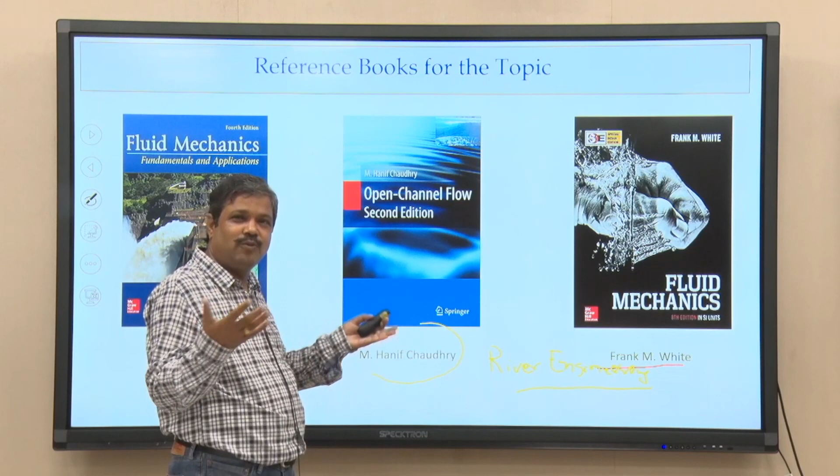But as I said, we are not introducing a new concept - whatever concepts we have learned, how to use the control volume concept, mass conservation equations, and momentum conservation equations, we apply for open channel flow. If I talk about open channel flow, I think almost all of you are familiar with it.

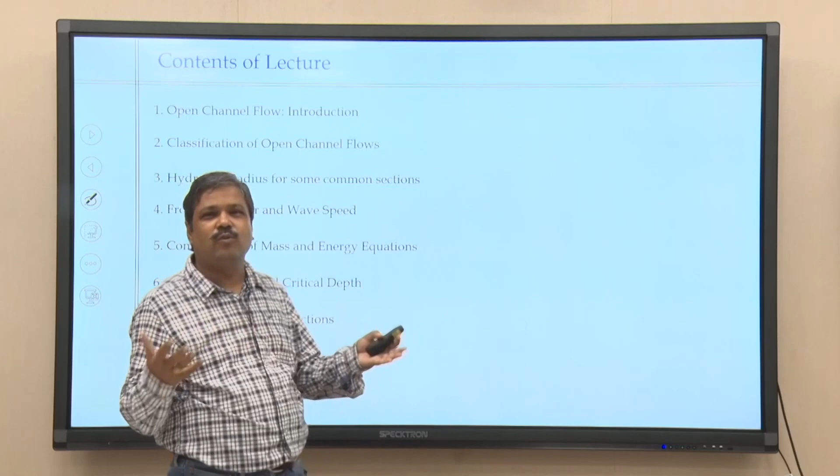If you look at most rivers, they have curved natures - we call these meandering rivers. But why? We don't know, we don't look at that much detail. But in open channel flow, we can address that - like when you have a river.

Natural flow systems - let us take examples like river flow. As you know, a river does not flow in a straight path, so it has meanders, curves. That is what river flow is.

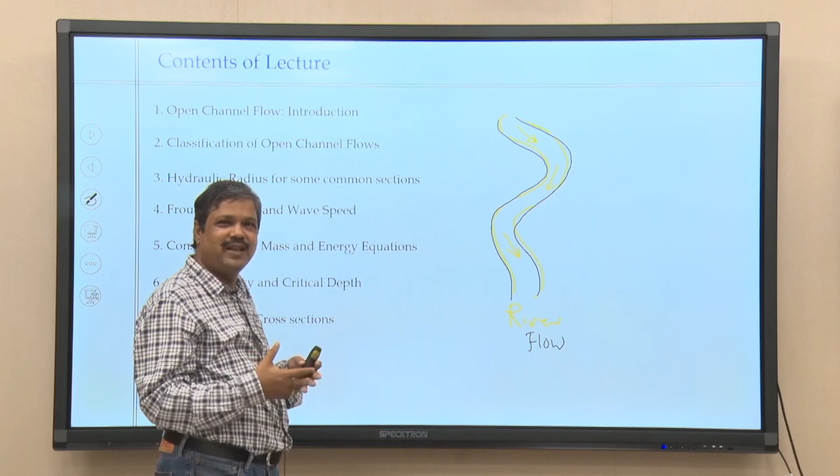Similarly, you can see these natural flow systems which are very complex. Today's world we have Google Earth geovisualizers, where you can see the complex river patterns. Anyway, we are not discussing that, or we try to make canal systems.

So you know, we construct canals or we construct drains, the stormwater drainage systems, which will have more or less a series of junctions, a series of outlets. So if you look at that, the flow can come this side, can go this side, like this.

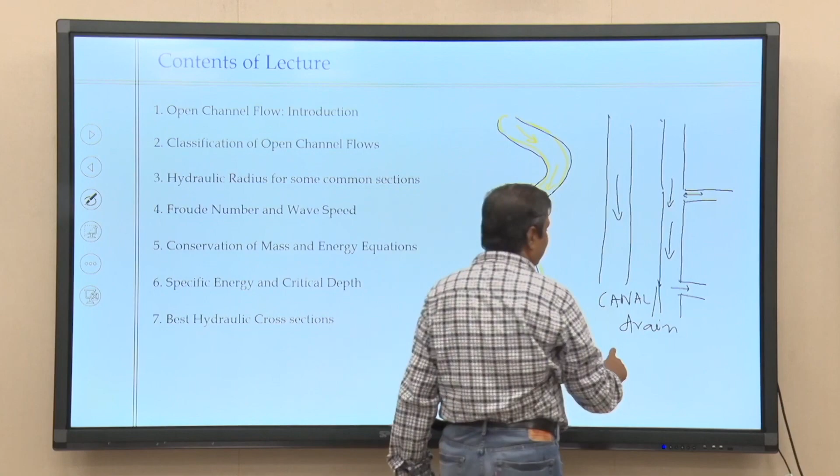So there are man-made systems like canals, drainage systems, stormwater drainage systems, and navigational channels - civilizations built the best navigation channels. So if you look at all of these, these are all open channel flow.

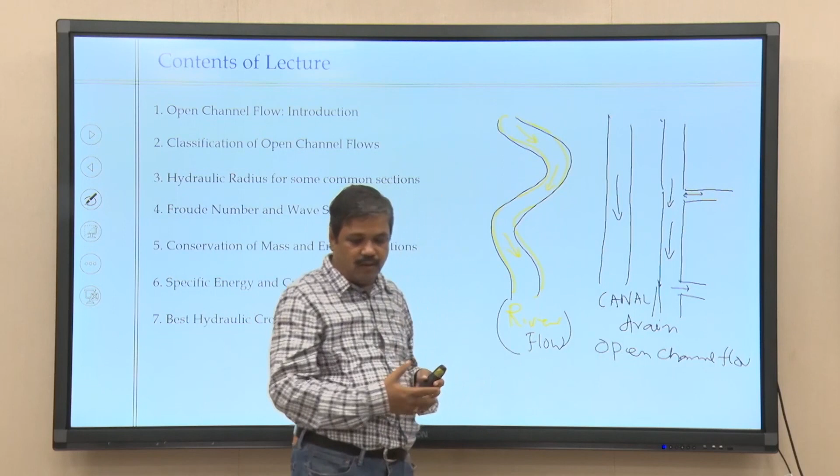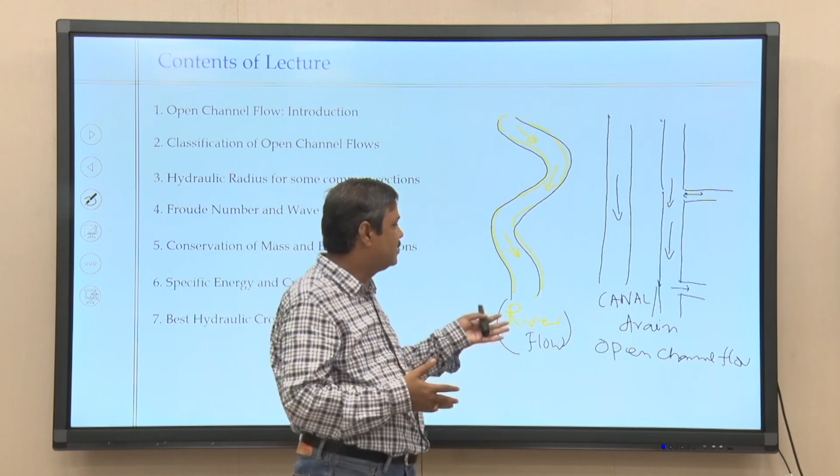On one side we have natural systems, and on the other side we have man-made systems for drainage networks, canal networks, and navigational canal networks. So there are a lot of systems we build to transport water or any liquid, any solid waste, through drainage systems or canal networks.

Which is having a free surface - basically we are talking about when we have a free surface. That means, if I take a cross section of a river, or a cross section of man-made channels, at say section 2 and section 1 - if I take the cross section at section 1, as expected, being a natural system, it could have a free surface here, for section 1.

Okay, so this is the bed, these are the cross sections, this is the top width, this is what the perimeters, as you know it. So this is the flow channel we have for natural systems, where the geometry may be complex. But when you come to canals, if you look at most canals nearby, either it is a trapezoidal or a rectangular shape. It will have the flow depth, it will have the perimeters, and it will have the top width.

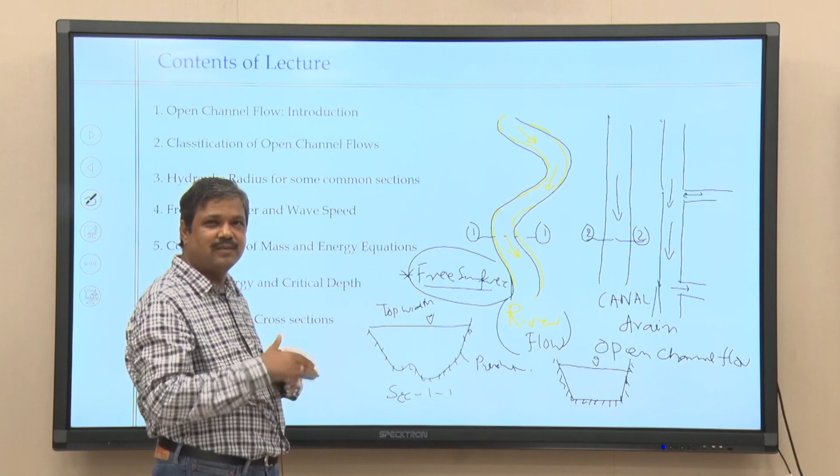Mostly what we are getting, both things have a common feature: the free surface. At that location the pressure is atmospheric, because it is a free surface. So at these locations pressure is equal to pressure atmosphere.

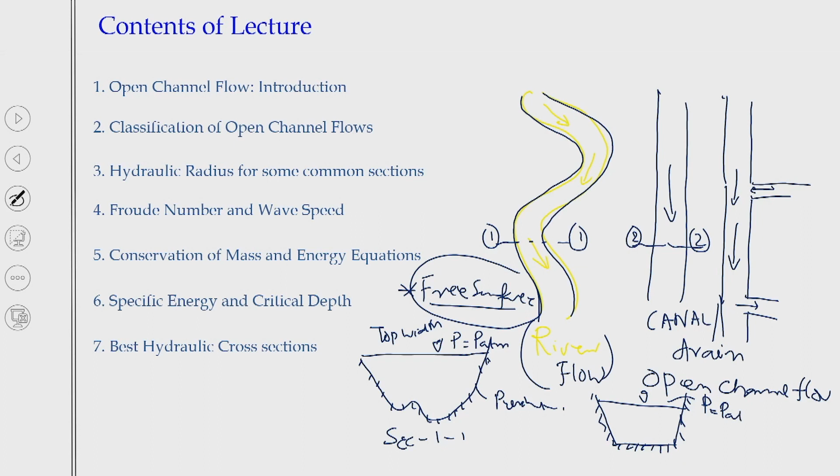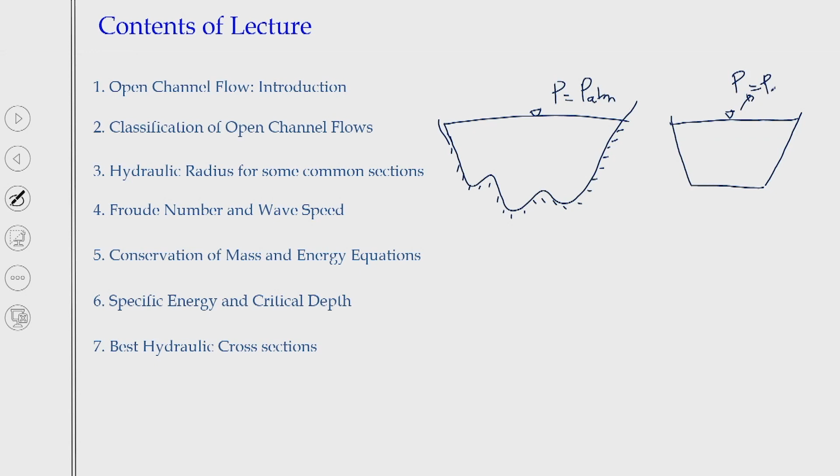Let me resketch the concept: if I have a natural river and I have the free surface, I can put it like this. This is the perimeter of the channel, this is the free surface where pressure is equal to P atmosphere. And here I have a man-made canal, maybe carrying storm water or sewage, whatever it be, but it has a free surface.

Same way, if I have a pipe that is not fully filled, so it is half filled, if that is the condition, the pressure at these locations also comes to atmospheric. This is what we can understand very easily: when you have a free surface or open channel flow, the pressure at the top where the water depth starts, designated by these symbols, is at atmospheric pressure.

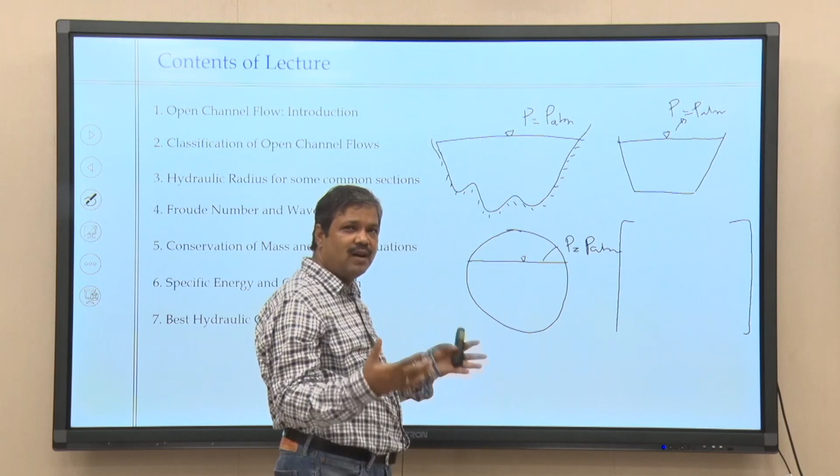So if that is the condition, we have only two force components with us now, because there is no pressure force, since pressure is at atmospheric levels. So we have two forces: one is gravity force, second is friction force. That is two. There is no surface pressure force component.

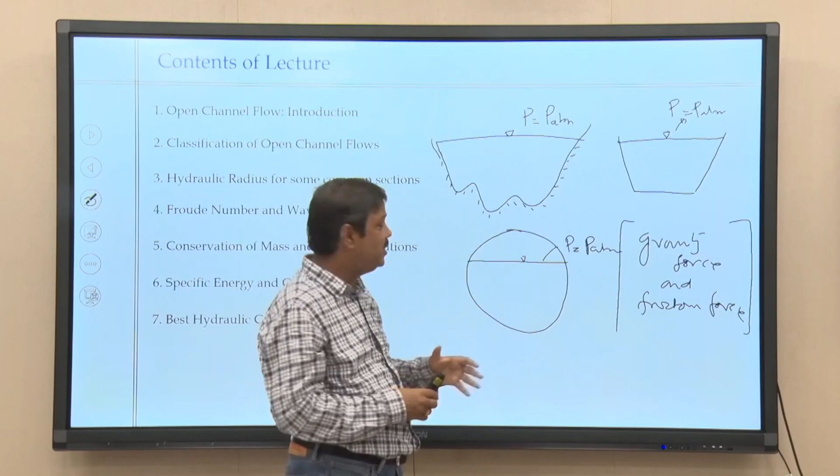We will discuss this more because there is a process. That is the difference between pipe flow and open channel flow. In pipe flow, we have pressure flow energy, but when we talk about open channel flow, we have only two forces: one is gravity force, another is friction force.

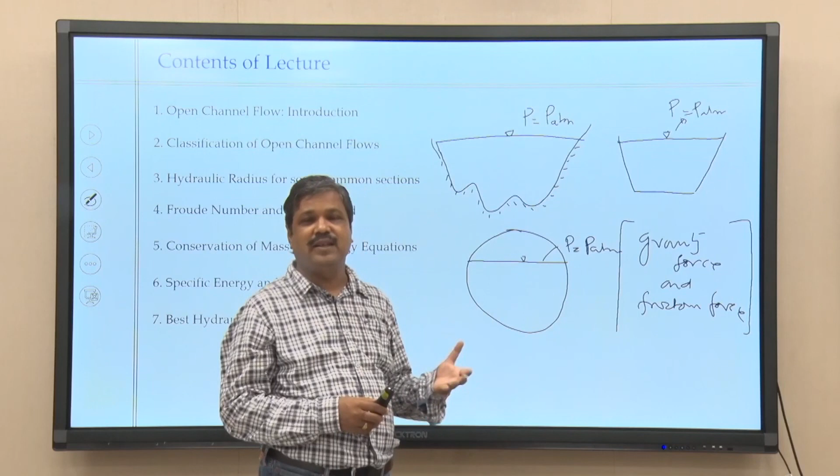Where does the friction come from? The friction comes from the bed or the perimeters. That means whatever type of perimeter I have, whatever type of roughness it has, similar to what we discussed for pipe flow roughness, the same concept applies here. Because of the presence of roughness in the perimeters of the channel, it gives a resistance force, a frictional resistance force.

The frictional force is given by that. So depending on the type of boundary and material roughness present, that is what will give you the frictional force, and you know what the gravity force component will be for any flow control volume. We can find out the gravity force, and we know the frictional force, because the friction force comes from the perimeters, and at these atmospheric levels there is no...

There will be drag forces, but that drag force is much negligible. Air drag force will be much negligible compared to the liquid we are considering, so that means we nullify that. Not only that, as you know, we have no-slip boundary conditions.

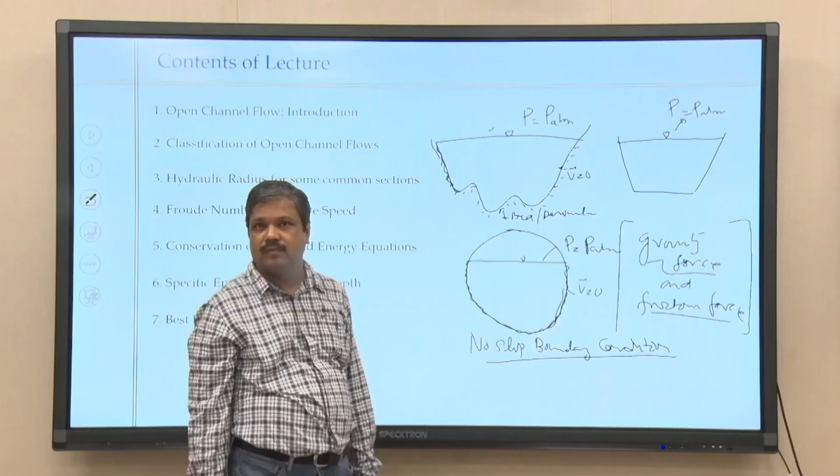Okay. That is what we discussed in the very first class, no slip boundary conditions. The no slip boundary condition imposes that the velocity near to this boundary will be 0. So, because of the no slip boundary condition, the boundary is fixed at the location, so the velocity becomes 0.

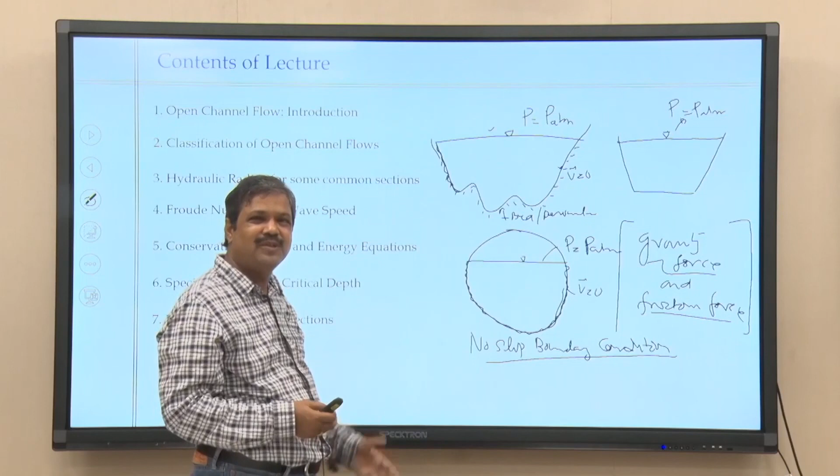So, you can now conceptually see that we are coming to a very simplified problem. We have solved many difficult problems in earlier classes, like the integral approach and the differential approach, but open channel flow is a very simplified case, because there is no pressure force component, the pressure is equal to atmospheric, and when we impose the no slip boundary condition, the velocity near to the boundary will be 0.

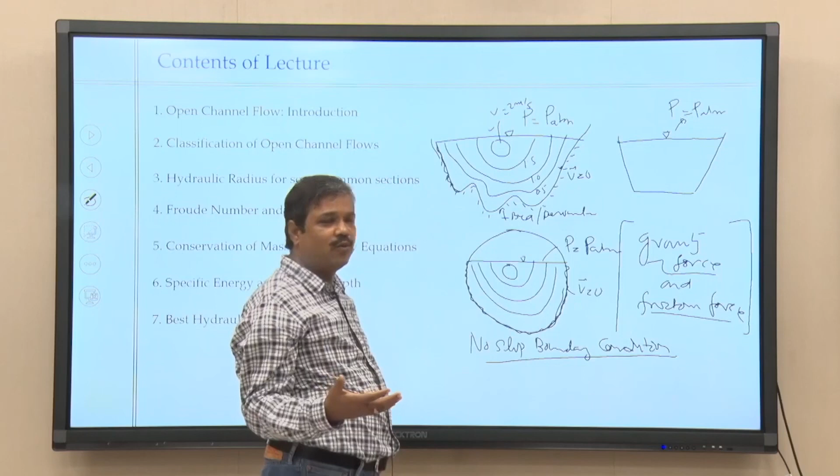So, since it is 0, I can draw the velocity distributions, the isovelocity contours. Maybe this velocity is equal to 2 meter per second, next maybe 1.5, 1, 0.5 meter per second. These are the contours of equal velocity, because near to the boundary velocity is 0. So, you can have a velocity distribution like this for this case also.

That is why I always encourage you to just draw the shape and try to understand how the velocity distributions are happening. So, if you understand that concept, you understand many of the things.

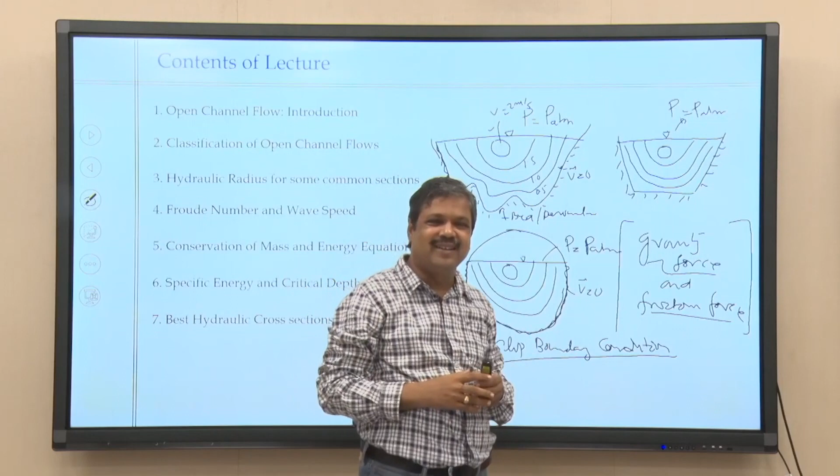Now, at the introduction level, we will also talk about the classifications of open channel flow, hydraulic radius for some common sections, and the wave speed and Froude numbers, which we have already discussed in dimensional analysis. Then maybe the next class will talk about other components like specific energy, the critical depth and all. But today's class will be confined up to the wave speed. More details I will discuss on that.

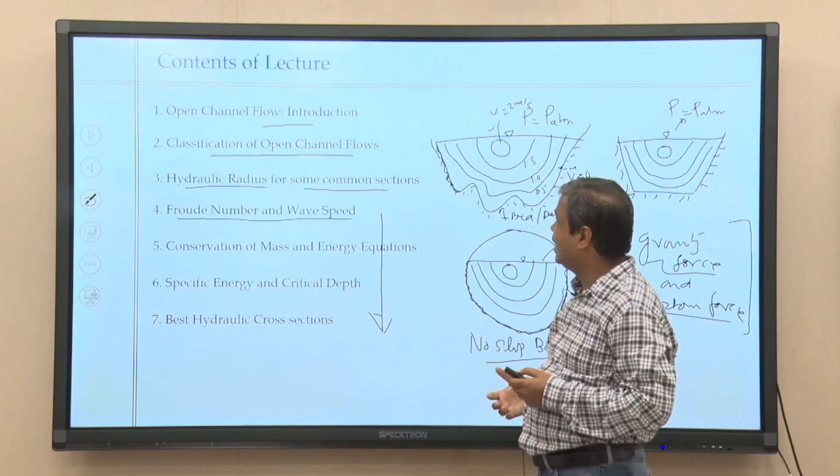Now, as I already said, basically we have the free surface boundary conditions. Once you have the free surface boundary conditions, remember basic pipe flow. When you are solving a pipe flow, I am drawing the same thing here. If you remember, we used to draw the hydraulic gradient line and energy gradient line for a pipe flow.

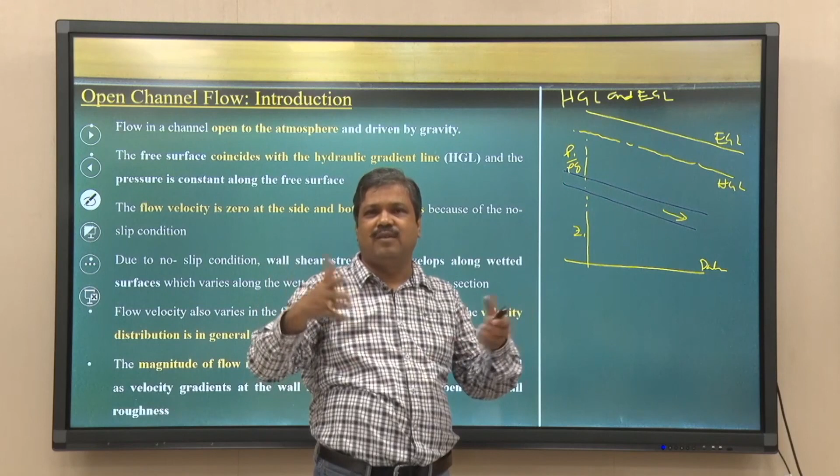If Z1 is from a particular datum, that is the datum head, then you have a pressure head, P1 by rho g, then you start the hydraulic gradient, and just on top of that you start the energy gradient line. That is what we did for the pipe flow, and that is the way we reflect how the energy losses are happening, or how the energy gradient lines are at each point of a pipe network, with a very simple representation through the energy gradient line and hydraulic gradient line.

But now I am coming to open channel flow; this is the pipe flow. So, this is my free surface in a channel flow. This is a channel flow having a slope, let it be theta. So, if I consider a datum, my free surface will be the hydraulic gradient line. Above that, I will have the energy gradient line.

Let y be the flow depth, and z is the distance from the datum. And this is V square by 2g, and you can have the kinetic energy correction factor. So, the technical difference between the pipe flow and this is that the pressure flow energy is not there when you talk about open channel flow.

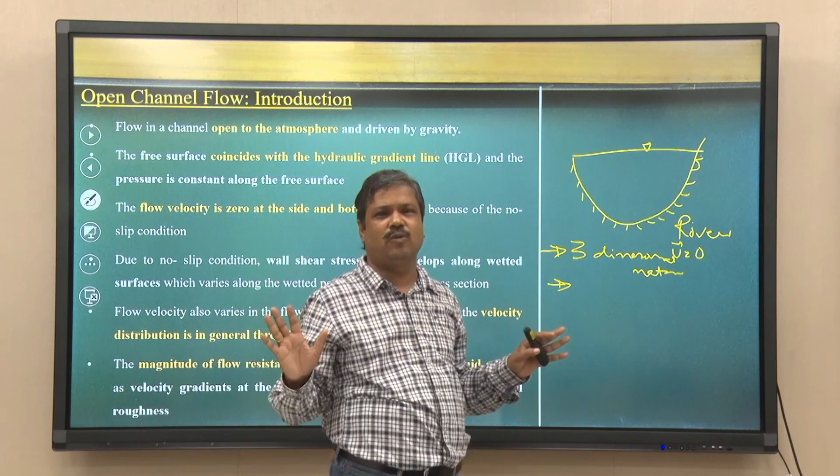Except very few cases, for example, for open channel flow when you have very thin sheet flow, maybe during the rainfall, beyond that most of the flow is turbulent flow. And we will discuss the flow characteristics in terms of subcritical, critical and

supercritical. This is just analogous to the subsonic, supersonic and sonic conditions you discussed in compressible flow. So, the same way, for incompressible flow in open channels where the gravity force dominates, we classify the flow into 3 categories: subcritical, critical and supercritical.

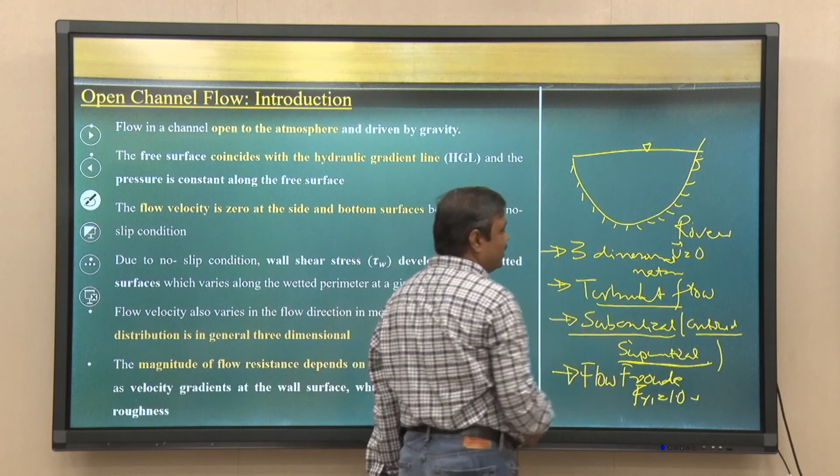As we discussed at the very beginning of dimensional analysis, we use the flow Froude number for these classifications: if the Froude number is equal to 1 it is critical, if it is greater than 1 it is supercritical, less than 1 it is subcritical. So basically we can have different classifications of the flow. We will discuss in more detail why we need subcritical and supercritical flow conditions.

What we are discussing is that we get the frictional forces, the shear stress acting over the surface, that is the wall shear stress developed along the wetted surface, which varies along the wetted perimeter at a given cross section. That variability is there, as you can understand from the shear stress distribution.

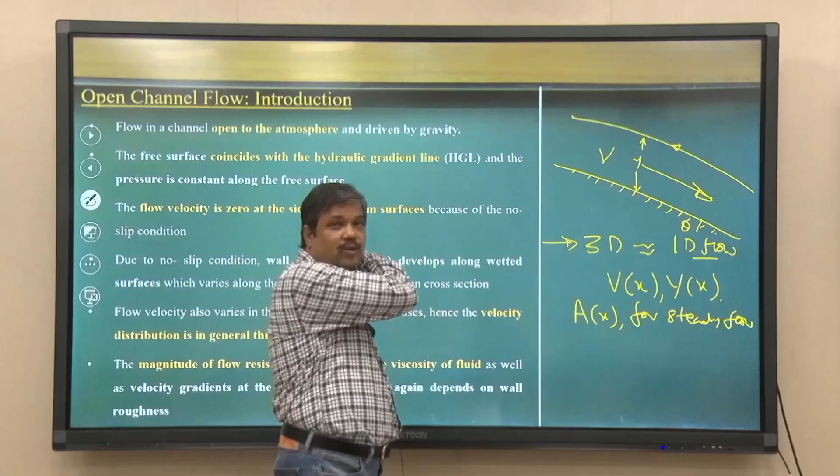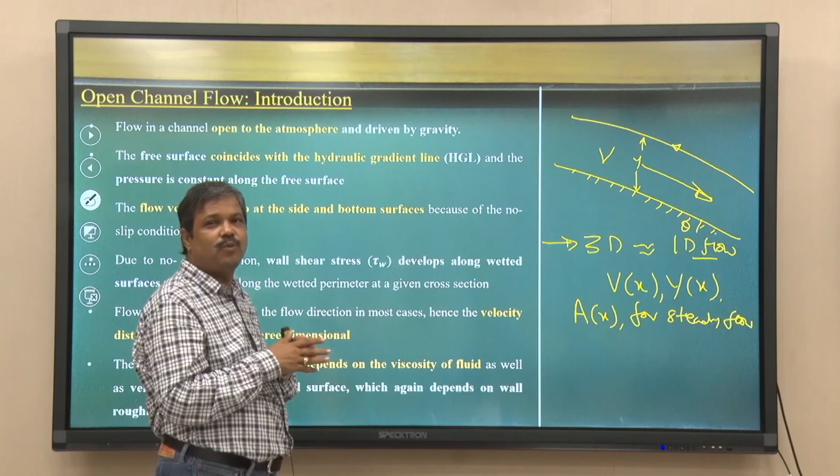If I have the velocity V, then I can say that V varies along the x direction, and if y is the flow depth, y also varies with x, and the area of flow also varies with x, for steady flow. For a steady flow, if I do not consider other dimensions, the average velocity of the flow in the x direction is going to change, the area of the flow is going to change, and the depth of the flow is going to change, which is of more interest for us.

But if there is an unsteady flow, and most of the time we also encounter unsteady flow with one dimensional approximations, we have V(x, t), y(x, t), and area A(x, t). That is what we discussed a lot. So, it will be a function of space and time. So basically the flow varies along the direction in most cases.

So, the velocity distribution, generally in three dimensions, is what I discussed. The magnitude of the flow resistance depends upon the viscosity of the fluid, as well as on the wall roughness, what type of roughness factors are there.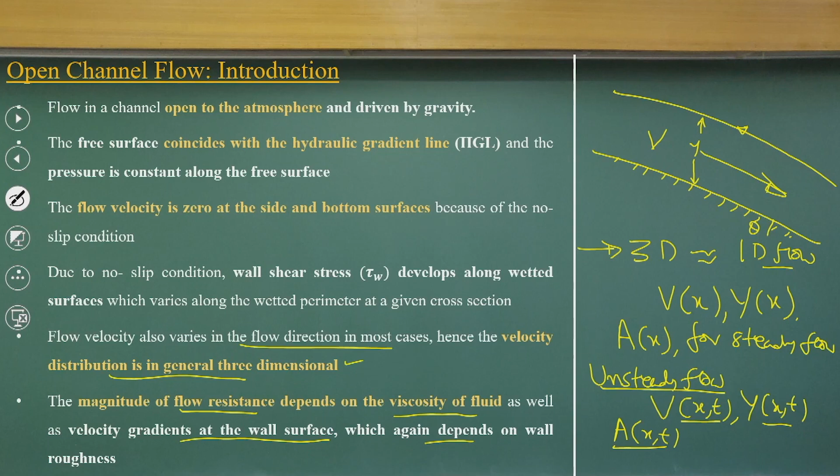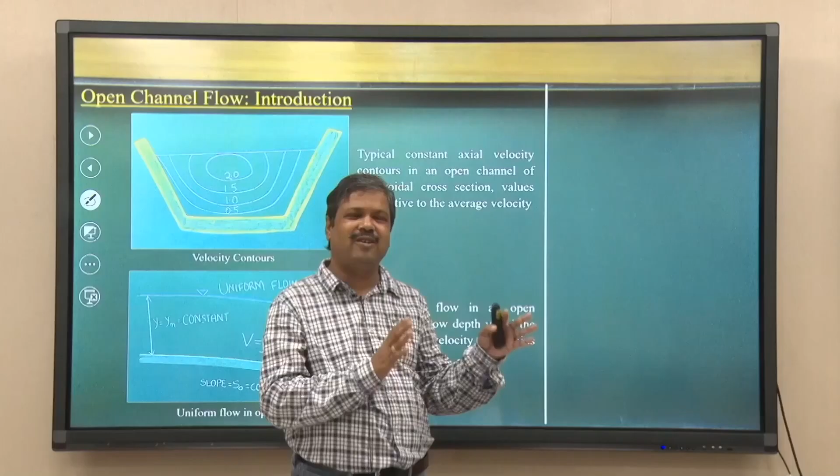So, the basic idea comes from this open channel flow. As I said at the very beginning, this is a very introductory level, in a very simplified way, that I am going to deliver these lectures. But if you are interested in an advanced level, courses are there in open channel flow, and courses are there on river engineering.

So, now let me come back to what I sketched at the very beginning. When you conduct a lab scale experiment, any flume type of experiment, which we have shown in dimensional analysis and similitude, continuing the same, we can measure the velocity distributions in an open channel. You can have instruments to measure the velocity.

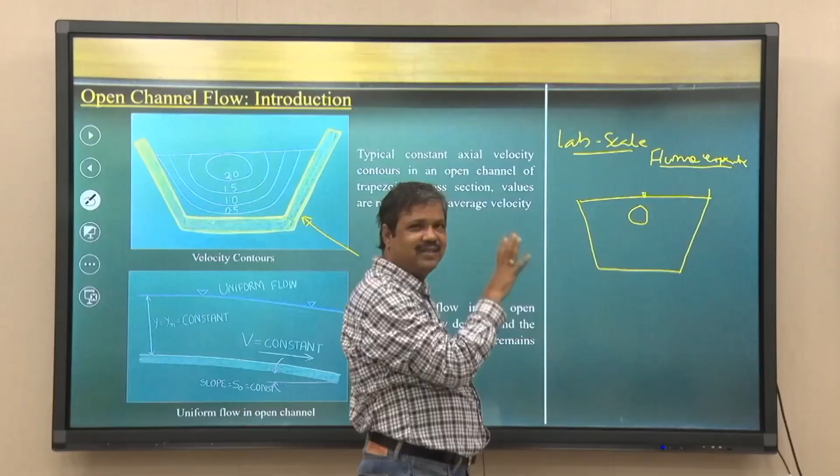As you measure the velocities in any trapezoidal channel, as expected, the maximum velocity will not be at the top. This is lab scale experimental data, that is what I emphasize. This is experimentally verified; this is how the distribution happens. So, you will get the velocity distributions like this.

Again I am repeating, this may be 2 meters per second, this is 1.5, this is 1, this is 0.5, and along the boundary the velocity is equal to 0. But we observed from experiment that if y is the depth, then the maximum velocity occurs about 0.2 times y, or 20% of the flow depth from the top surface. That is the experimental finding about this velocity distribution.

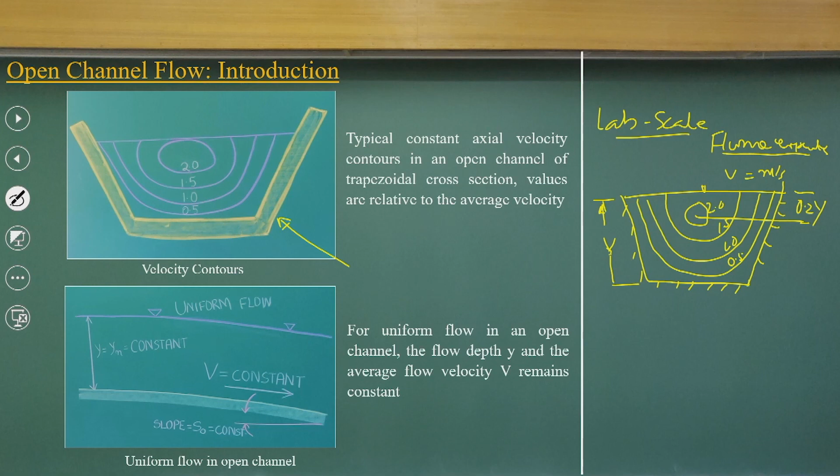That means we can easily get the velocity distributions from the experimental data set. This is not difficult. And since it is a turbulent flow, its velocity distribution will be a logarithmic velocity distribution, as we discussed in the boundary layer concept. So, velocity distributions will also follow the logarithmic velocity distribution.

But we are not worried more about the velocity distributions in these classes. We are more towards understanding the general nature of the flow. If I know these velocity distributions from the experimental data, mostly what we are looking at is how much energy loss is happening. That is our worry. We are not bothering about the velocity distributions, because anyway it is an open channel flow.

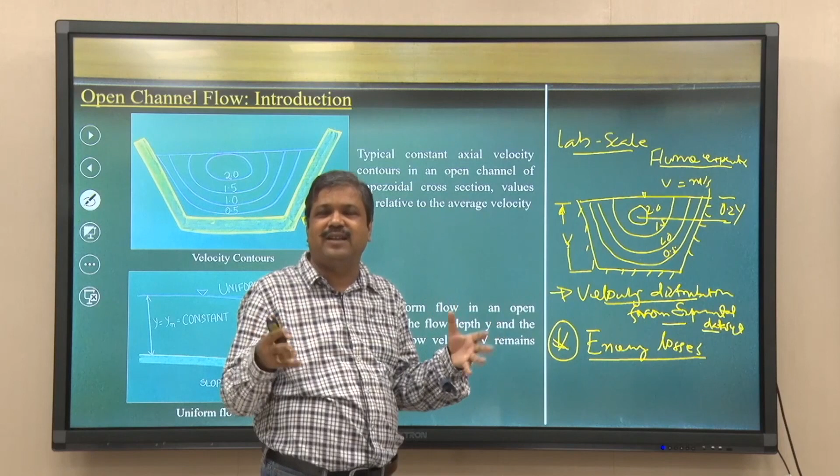For undergraduate levels, here we are talking in more detail about how much energy loss happens, as we estimated for the pipe flow. We estimated it using the Moody chart, and with a lot of examples we demonstrated how to estimate the energy losses. Same way, if you have a network of open channel flow, we have to understand how much energy loss is happening for different conditions.

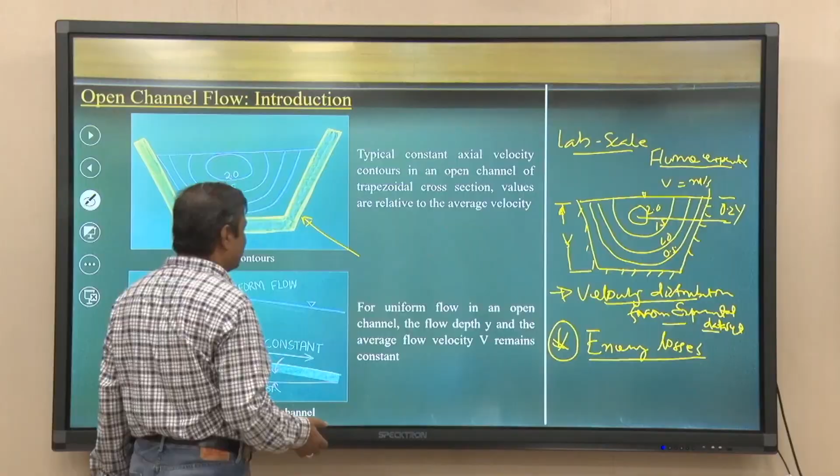So, there are the classifications. One is uniform flow, as we discussed in flow classifications; I am not going into detail. Now, as I discussed, we talk about natural channels, artificial channels and open channels. The name open means one of the sides is open, so it is not having a cover at the top.

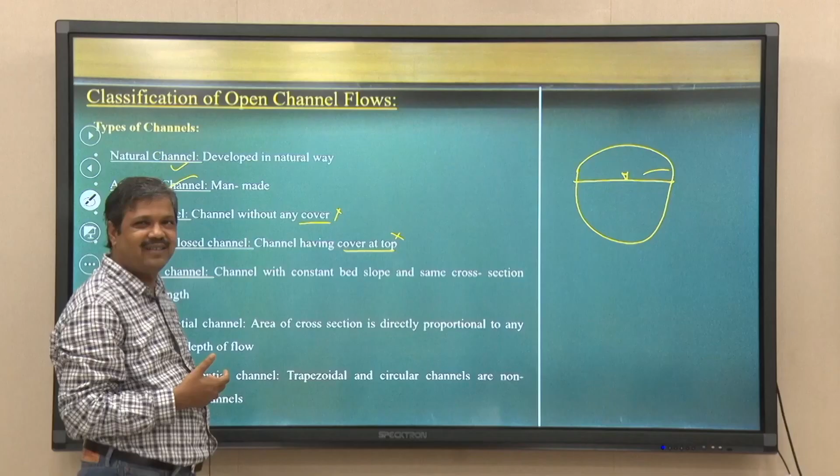I think this definition, without any cover, is not that correct. I will tell you that wherever you have a free surface, even in a pipe flow, that condition is open channel flow; it is not related to covers. Anyway, that may be a simple way of explaining, without going through pressure being equal to atmospheric and the pressure energy not being significant in this case. The cover does not matter.

We go for very simple cases like prismatic channels. Many times when you have man-made cross sections, we try to make the same cross section along the channel, with a constant bed slope.

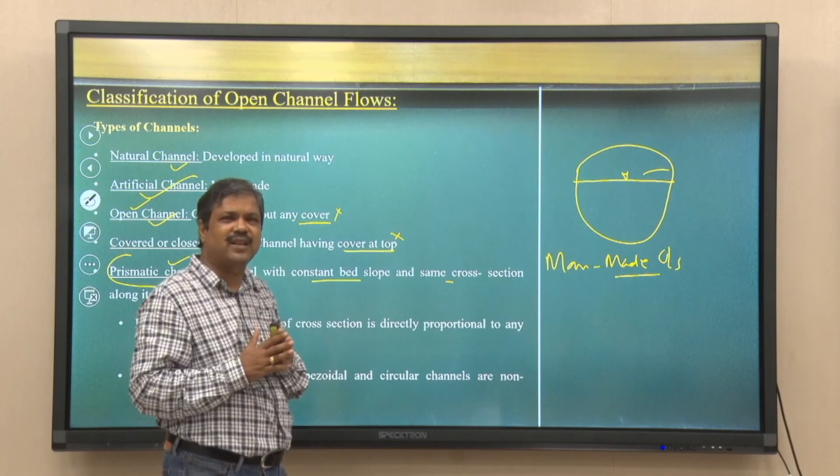That is what you do when you are laying out canals. Mostly you try to make the cross sections the same, as well as the bed slope more or less constant. So, that is what prismatic channels are. Then, when the cross section is directly proportional to any power of the depth of flow, this is an exponential channel, and trapezoidal channels are non-exponential channels. Those are basic definitions.

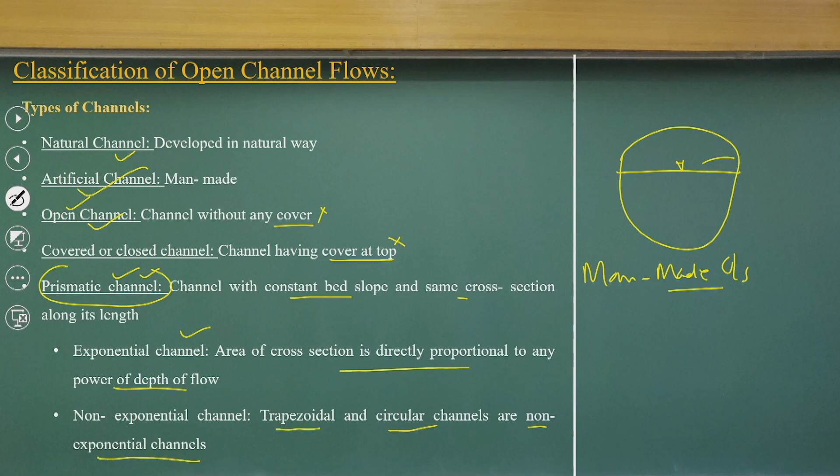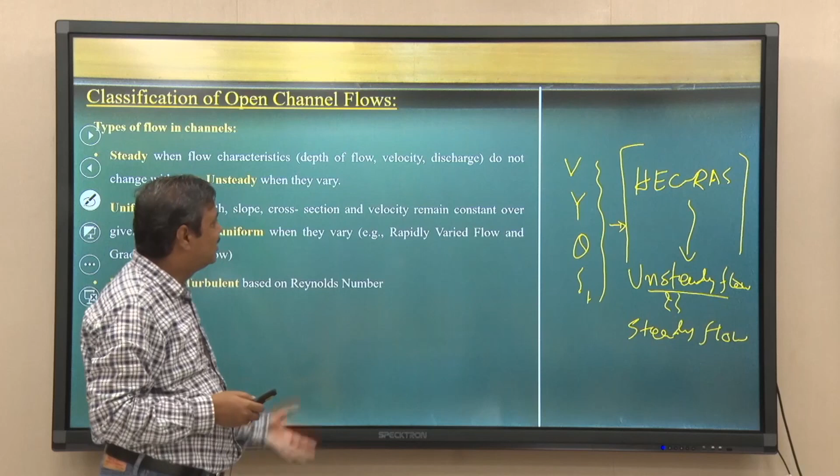So, steady flow is a very simple approximation we make for open channel flow, but in real life conditions, even for canal flow or river flow, mostly they are unsteady flow. Mostly they are unsteady flow, but we approximate them as steady flow. But nowadays for river models we have HEC-RAS, so we can use detailed unsteady flow analysis, that is possible, but anyway this is undergraduate level.

Then another simplification is uniform flow. Uniform flow is where the depth, slope, cross section, and velocity all remain constant. So, all are constant: depth, slope, cross section, velocity. How does it happen? It happens when the sum of the forces acting on the system is 0.

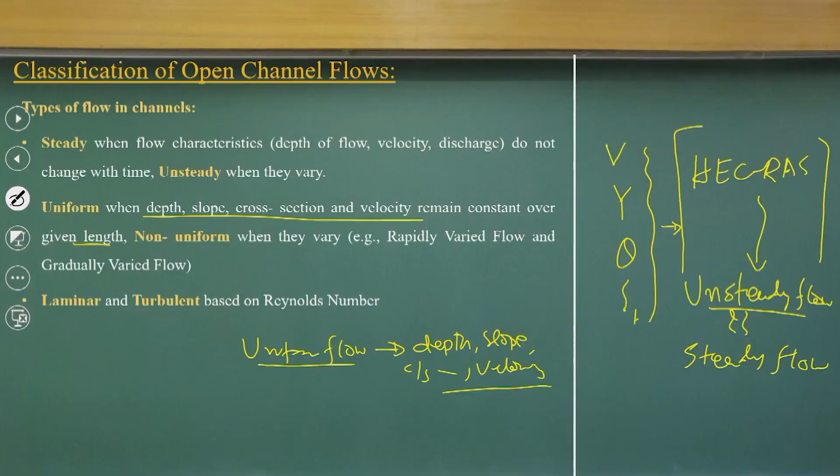It is like the terminal velocity of a free-falling object, which attains a terminal velocity. The same concept: if you have a long open channel, there may be a stretch where the net force acting on the control volume becomes 0. There is no acceleration, no deceleration. Those regions will have constant depth, slope, cross section and velocity. That flow is what we call uniform flow.

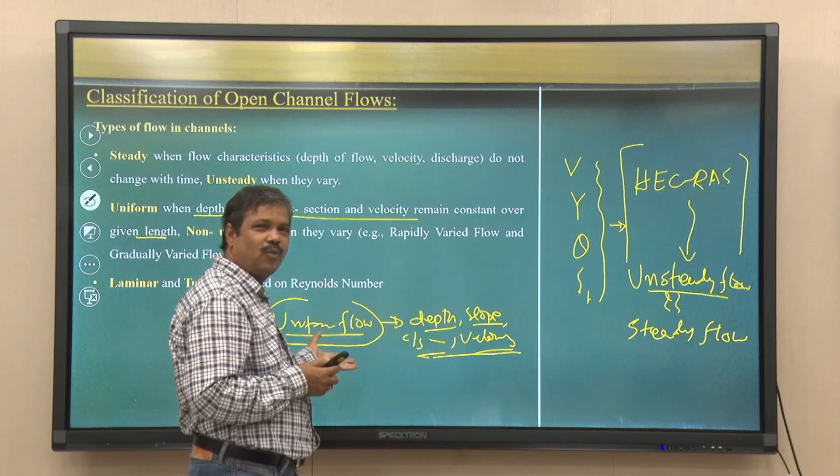So, it is theoretically possible to have uniform flow, but very rarely can we see real uniform flow in natural conditions, because it requires that the sum of the forces acting on the system equals 0, as when you drop a ball it attains a terminal velocity. The same way, uniform flow is attained when there is no significant change in depth, slope, velocity and cross section. That is a very specialized condition.

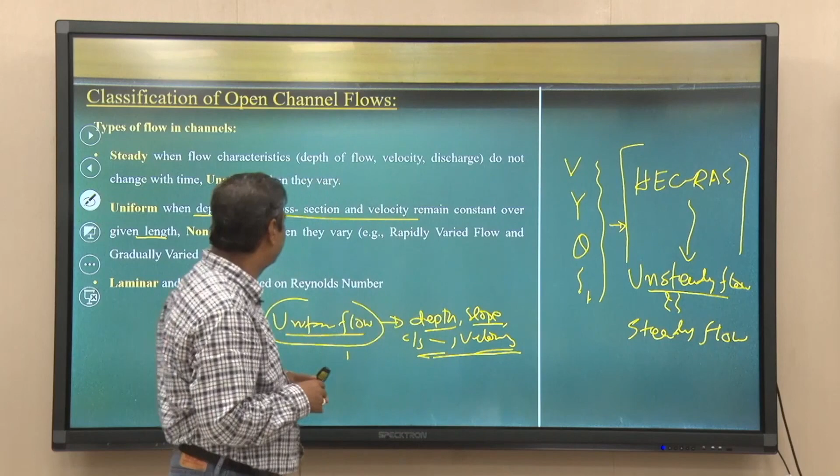Otherwise, the flow is non-uniform, and we classify it into two types: rapidly varied flow and gradually varied flow. In rapidly varied flow, the rate of change of any flow parameter is very significant, of very high order. But if parameters like depth, velocity, slope, or energy slope are not changing that drastically or abruptly, and there is a very gentle change of these properties, then we call it gradually varied flow.

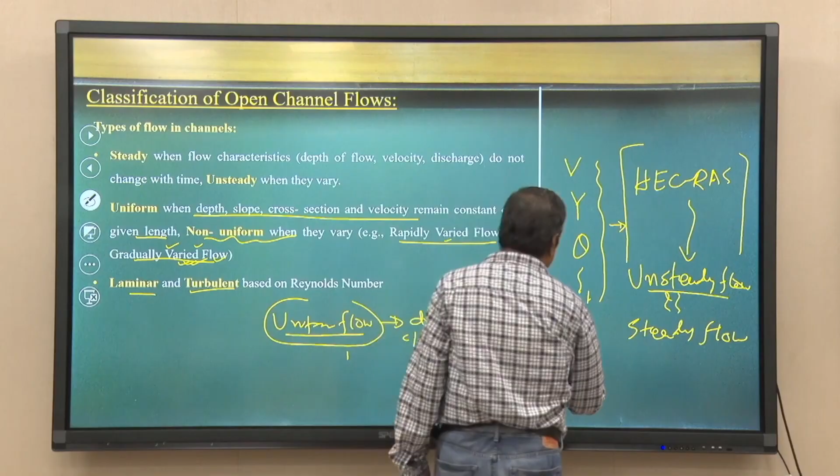As we discussed, mostly we have turbulent flow, except in a few very rare cases of laminar flow. So, I am repeating it: very rarely we will have laminar flow, very rarely we will have uniform flow. In some cases we can simplify to steady flow; otherwise the flow we consider is unsteady, turbulent, non-uniform, and mostly we also design for subcritical flow.

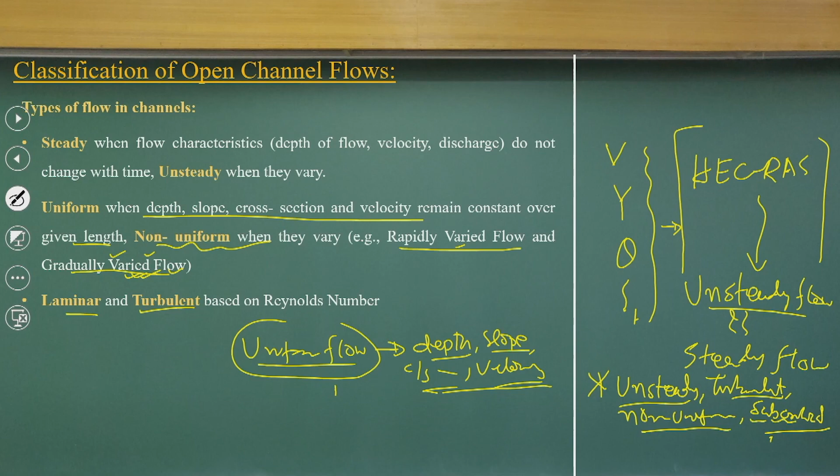So, basically what we are looking at is unsteady, turbulent, non-uniform and subcritical flow. That is the basic classification of most of the flow in open channels. Now, if you look at a very simple case to classify between all these flow systems, again I am sketching this part. As I said, there is a very long channel, then there is a drop, then we have the channel.

To change the slope in a canal, we make a drop here. This is the drop structure. If it is a very long canal, we may be attaining a uniform flow, UF. As I discussed earlier, these are the flow conditions where the net force acting is 0. That means the gravity force and the friction force are equal to each other. That is what happens in the case of uniform flow.

As there is a change of grade between these two slopes, you can understand it. If I make the free streamlines of a free surface flow, the flow comes like this, then like this, then this type of thing. So, if you look at that, this is uniform flow. After that the slope is changing, but very gradually. As it is changing gradually, we say gradually varied flow.

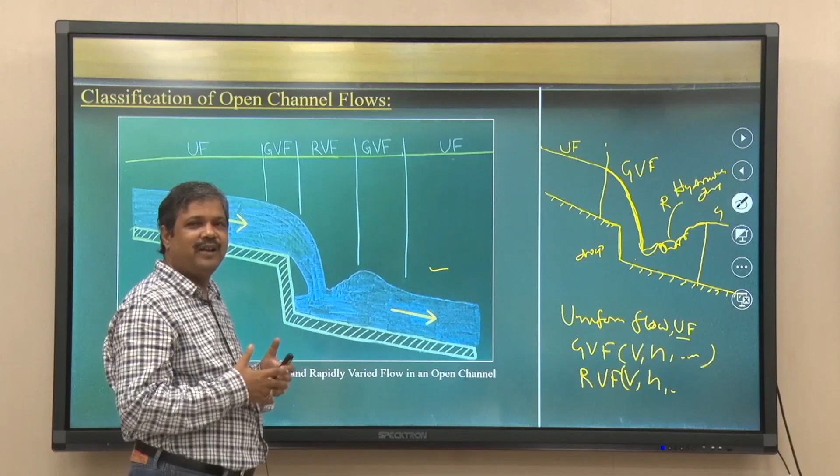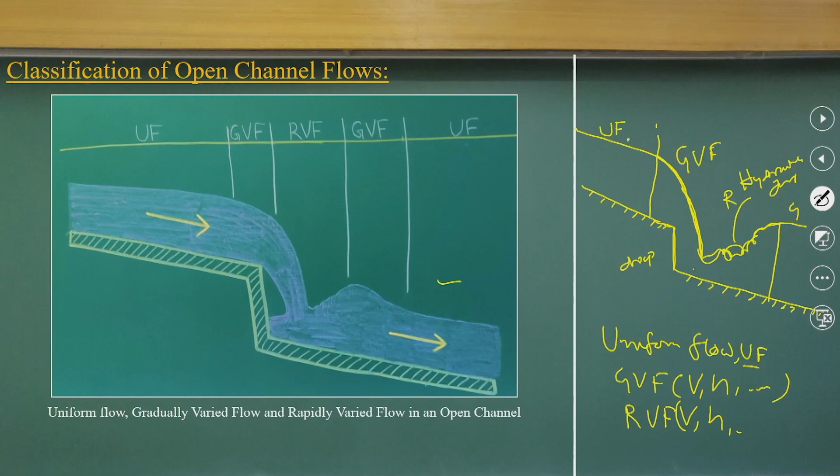So, the basic idea, again I have to tell you, please sketch it like a streamline. You are used to sketching streamlines for any flow pattern. Similarly, when you have an interaction between any two open channel flows, try to sketch the free surface lines. If you can really sketch the free surface line, then you can understand what type of flows are happening, exactly the same way as we discussed streamline drawing. So, in open channel flow, we should draw the approximate free surface lines.

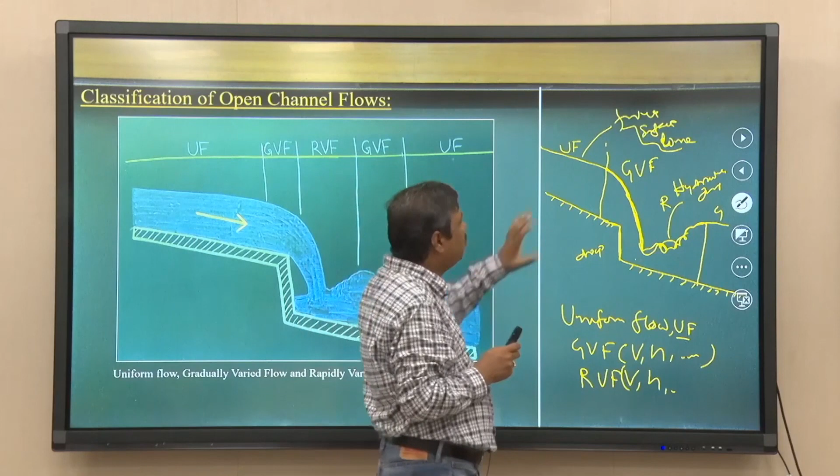If you can draw the approximate free surface line, we can understand where the uniform flow happens, which regions have gradually varied flow, and which regions have rapidly varied flow, gradually varied flow, then uniform flow. So, you can approximate this flow in three categories. For example, uniform flow we can easily understand, because there is no acceleration, no deceleration, no change of flow depth, no change of any flow characteristics. That means the sum of the forces is equal to 0. This is a very simple case; we can solve it by equating the basic parts: gravity force is equal to friction force.

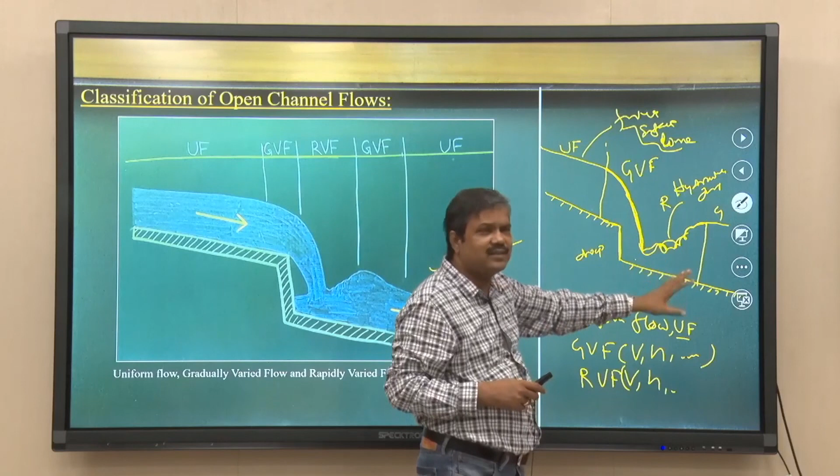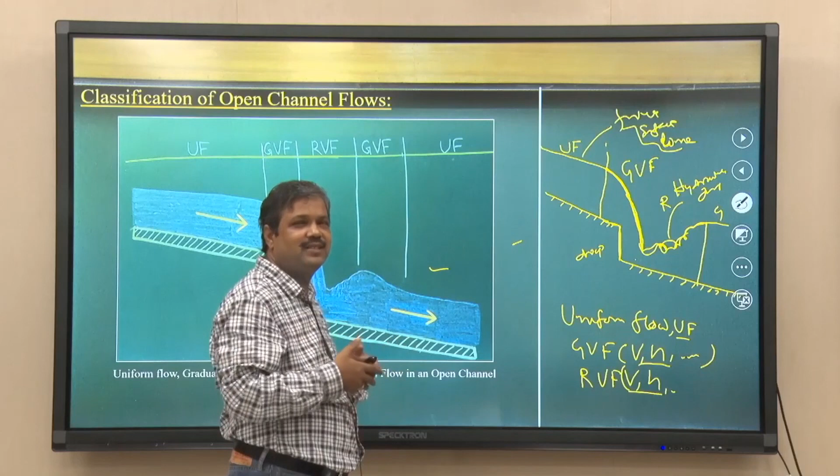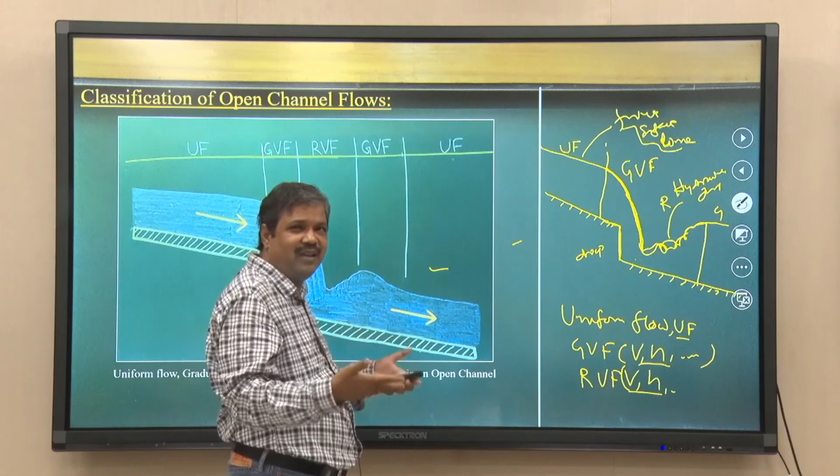We can also simplify gradually varied flow and rapidly varied flow, but we have to classify the flow as we do for other cases like subcritical, critical, unsteady, steady. So, in open channels we classify uniform flow, gradually varied flow, rapidly varied flow, with respect to the change of flow characteristics, the velocity, depth, energy slope, shear stress, and the rate of change with respect to space. I think you could understand this is very easy. As I said earlier, we have gone through very complex subjects. This is a very easy subject for us now.

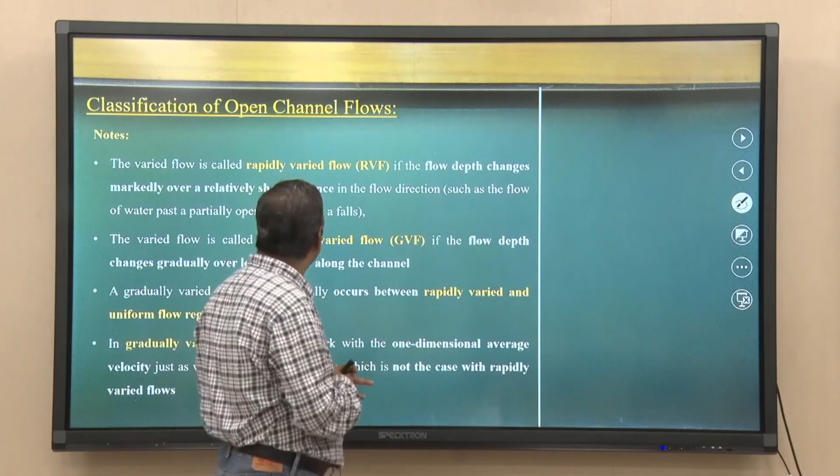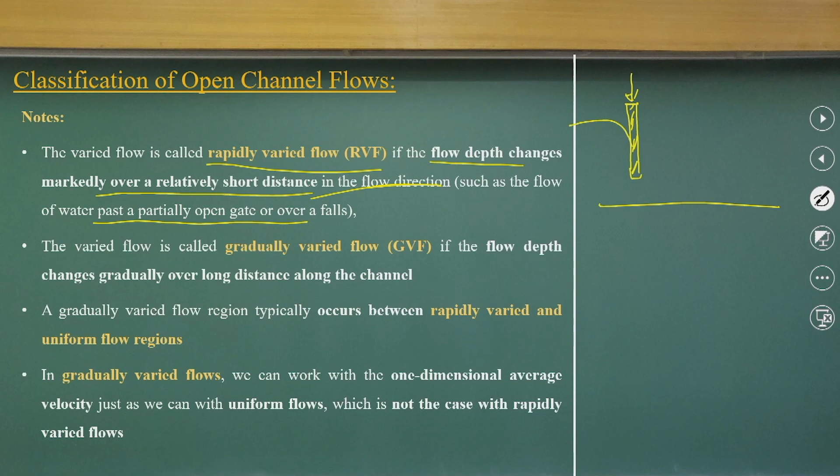The definition says that rapidly varied flow is when the flow depth changes markedly over a relatively short distance in the flow direction. An example is flow past a partially open gate. If you have a gate and you are lowering it, with this being the free surface, there will be rapidly varied flow and a hydraulic jump, which we will cover in more detail. So there will be a flow change.

So these are the regions of rapidly varied flow, but there are also regions of gradually varied flow. Here we have the free surface, as I am sketching it. In gradually varied flow, the flow depth changes gradually over a long distance along the channel. This means the distance is much longer for the change in slopes.

This typically occurs between rapidly varied flow and uniform flow, similar to how we talk about laminar and turbulent boundary layer transitions. The gradually varied flow happens intermittently between rapidly varied flow and uniform flow.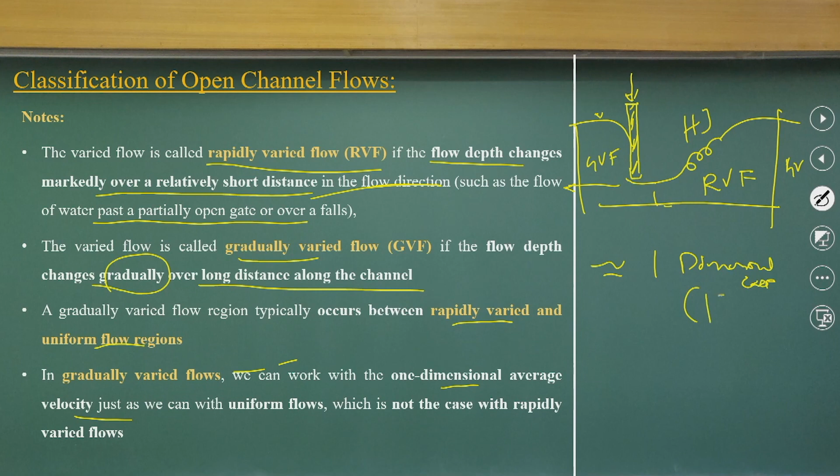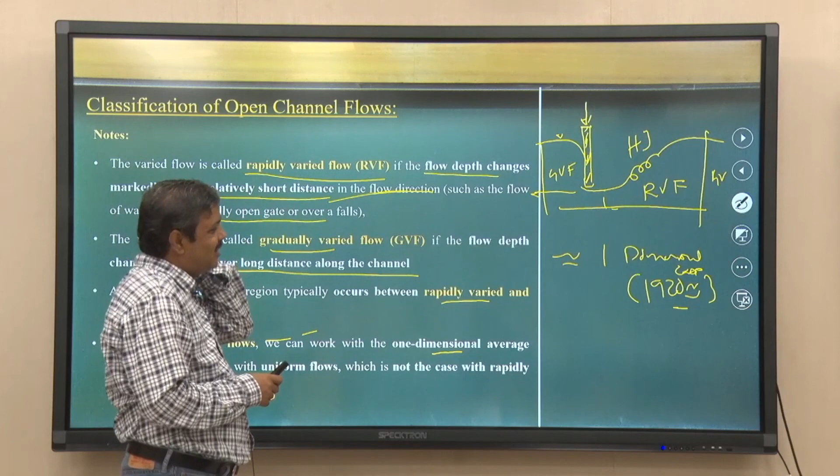We are talking about a very simplified one-dimensional case, concepts built around the 1920s or 1930s, almost 100 years back. I do not want to focus too much on that, but note that now we have technology with us. It is not that we only talk about very simplified cases, but I want to highlight that 100 years back there were no computers, so methodologies were more of a conceptual framework. Now they have introduced a new concept to look at this.

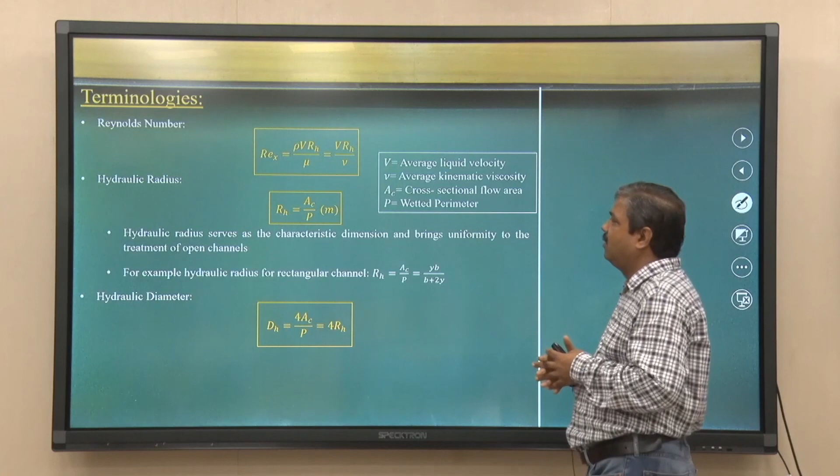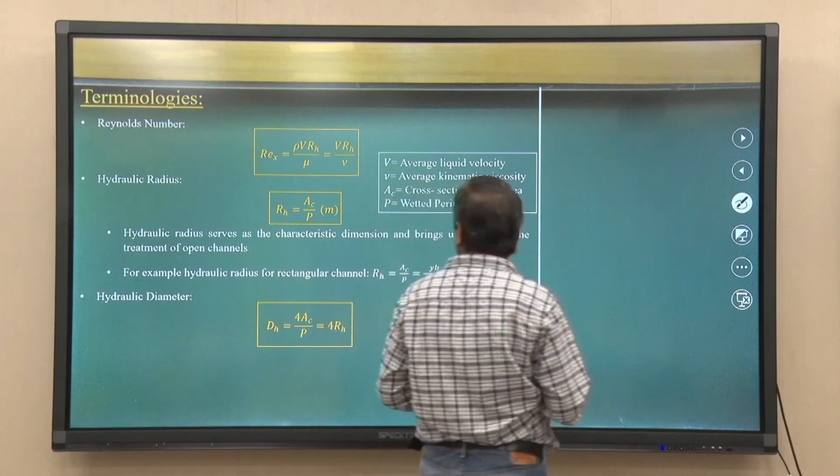One concept is called hydraulic radius, since I am sketching different cross sections. In pipe flow you may have circular or square pipes, but in natural rivers and different canal or drainage structures, we need the hydraulic radius concept. The simple concept of hydraulic radius is A by P, where P is the wetted perimeter, excluding the top surface which is the free surface, and A is the area of the flow cross section. This is equivalent to meter dimensions, so hydraulic radius is defined as A by P.

So what does that mean? Take a simple example of a rectangular channel, where y is the depth and b is the width. The area will simply be b into y. The wetted perimeter P will be b plus 2y, since you have y from this side as well as y from that side. So hydraulic radius will be A by P, which means b times y divided by b plus 2y.

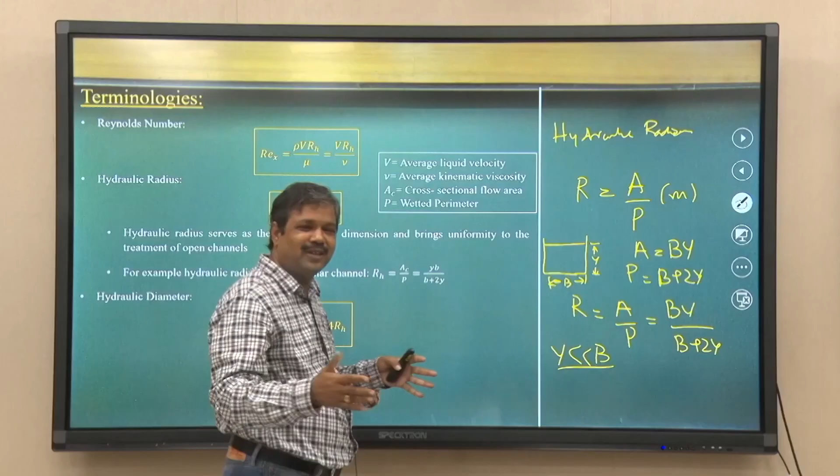If y is much less than b, as in river systems where b might be around 200 or 300 meters and y is only 3 or 4 meters, then the 2y term in the denominator becomes negligible compared to b. So the hydraulic radius r becomes close to y. That means if I extend b, making the channel wider, my hydraulic radius becomes essentially just the depth.

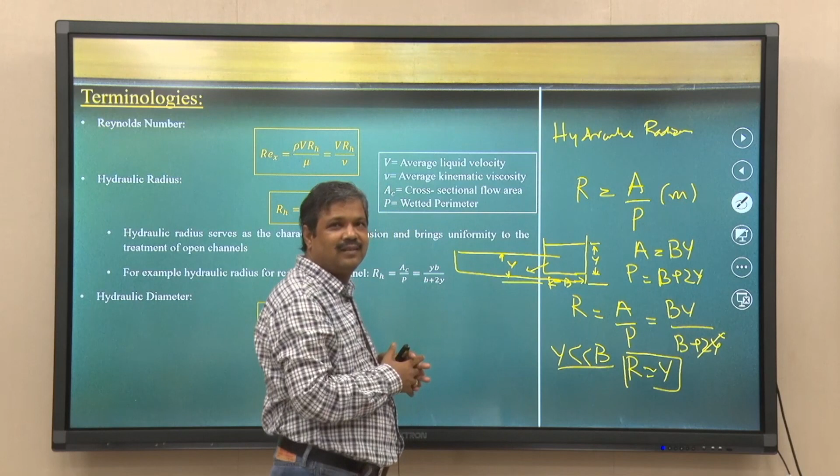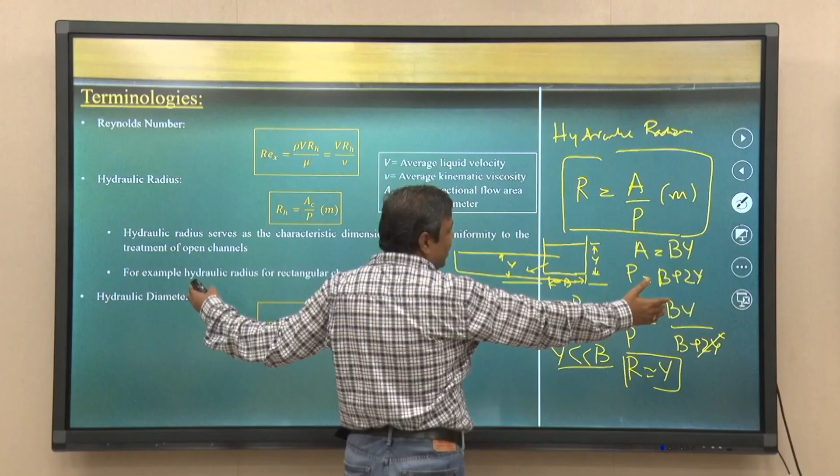So, try to understand it. If I make it wider, my radius will be only the depth, that is what is converging it. So, that is a simplified hydraulic radius we propose for open channel flow, because we are synchronized with our pipe flow concepts. To make it a similar type of concept, that is the reason the concept of hydraulic radius has come in, because we are trained for pipe flows. That is the reason we want an equivalent to open channel flow, making it equivalent to pipe flow. That is the reason we introduce a hydraulic radius, which is the area by the wetted perimeter, and as it becomes wider and wider, the hydraulic radius becomes closer to the depth.

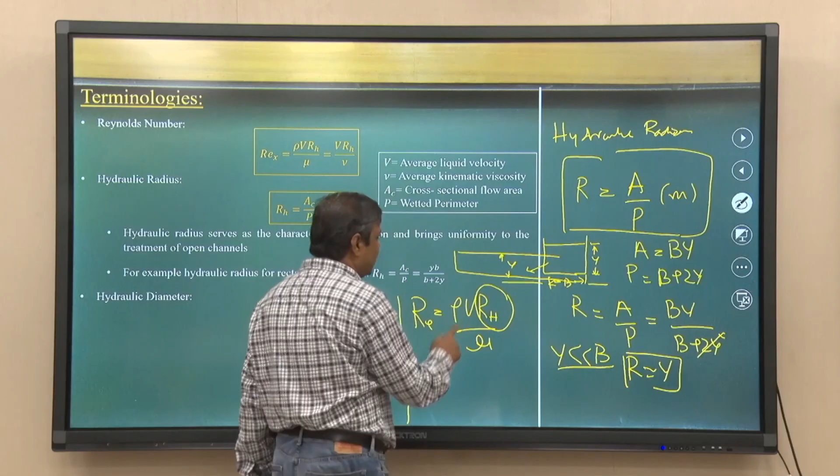Most of the time, you just say that the flow is turbulent, do not talk about laminar flow; the flow Reynolds number goes much beyond the critical Reynolds number for open channel flow, which is 500. As equivalent to the hydraulic diameter, when you put it, again we are putting in 4 times this value. That is the reason, please do not get confused between diameter and radius, which has a factor of 2, but for the equivalent D_h as you put it, that is the reason 4 comes in here. So, diameter is 4 times this. That is the reason in pipe flow the critical Reynolds number to define turbulent flow is 2000, but for open channel flow...

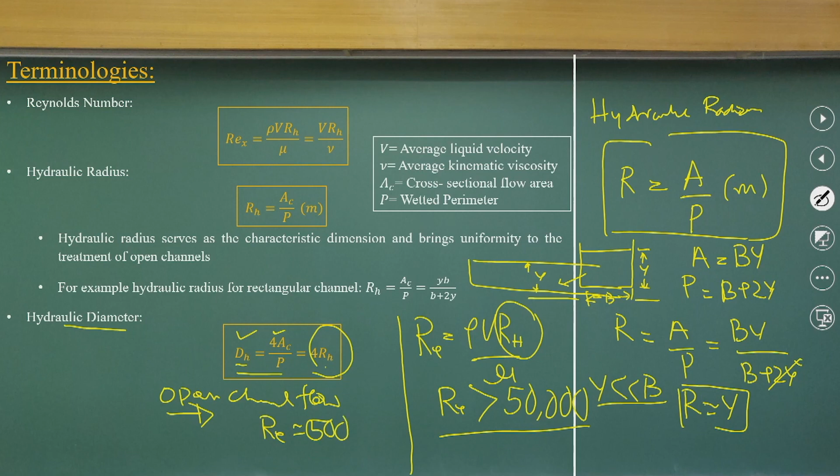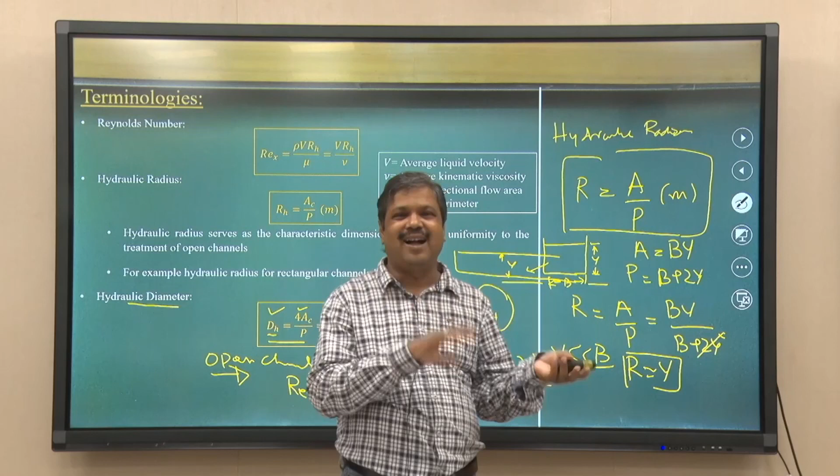We have the critical Reynolds number as just 500, because there is a factor of 4 to make it an equivalent reference. So we introduce a new concept of hydraulic radius and hydraulic diameter to make pipe flow and open channel flow similar.

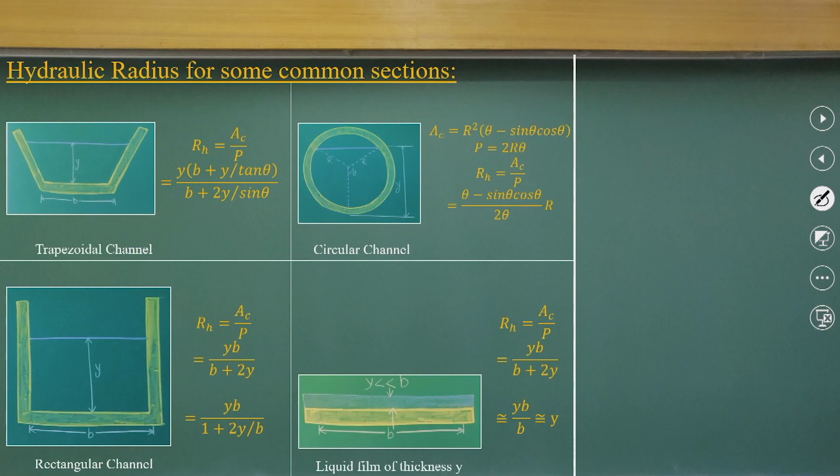To analyze this, many undergraduate course questions ask basic things, even in GATE or engineering services exams, about how to estimate the wetted perimeter, where to estimate the area, what is R, and what is the diameter.

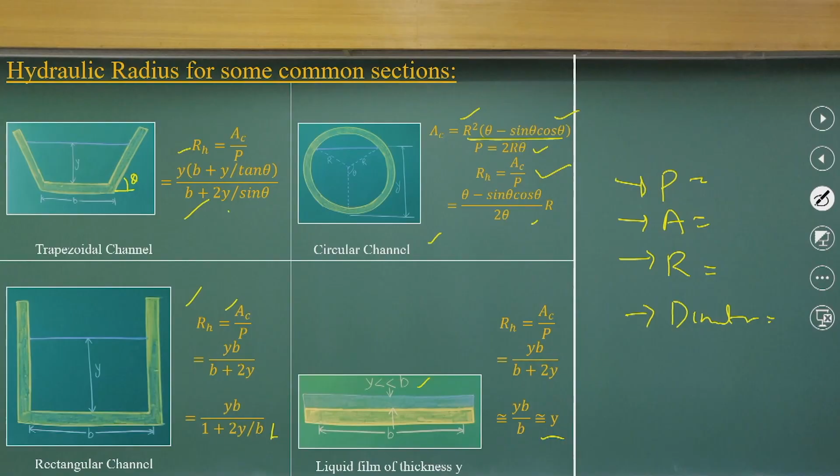The same way we look at the theta part here to define the hydraulic radius, and what comes out for trapezoidal channels, which includes the wetted perimeter of this as well as this, and we try to find out the hydraulic radius or hydraulic diameter for different flow geometries.

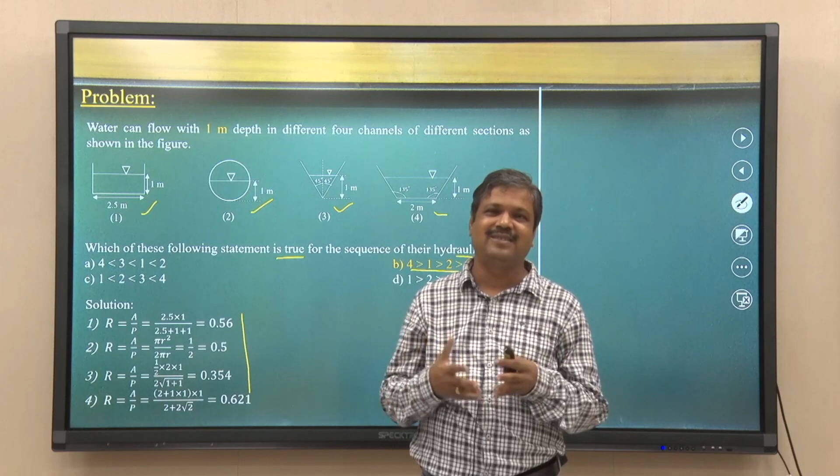So it's very simple, you just have to understand how to estimate the area, flow, perimeter, and estimate the hydraulic radius. So, with this, I conclude today's lecture. Thank you.